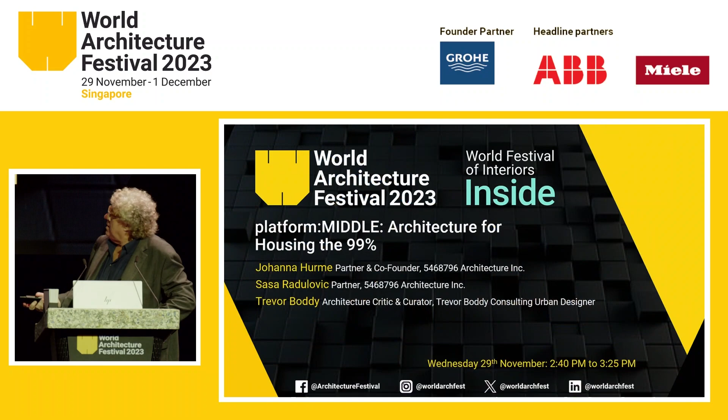Okay, this is the book, which you see is in a slipcase with 4 independent, editorially autonomous sections. Johanna will be talking about it in a moment.

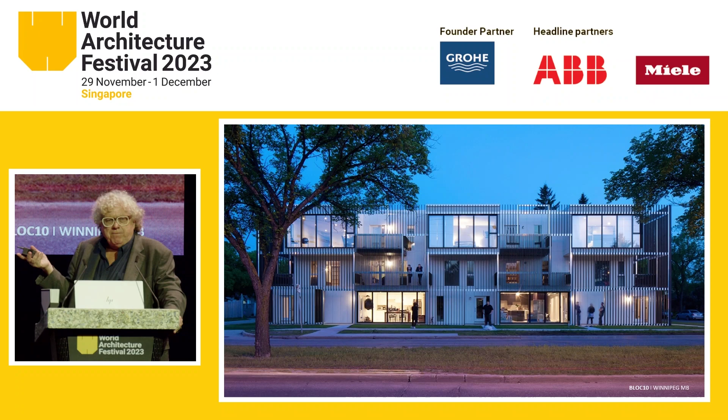This is the first building by 5468796 I wrote about. It's a housing project on Winnipeg's Grant Avenue called BLOC10—all of their projects have a number associated. To me, it's a fantastic interrogation of the idea of the walk-up wood frame apartment building, which is built all around the world. Now there are some problems with wood frame walk-up apartments.

Historically, Winnipeg has a high concentration of Eastern European immigrants, so the hallways of walk-up wood frame apartments always smell forever of boiled cabbage. Amazingly, even though more recent occupants are immigrants from Afghanistan and Venezuela, they still smell of boiled cabbage.

In a few moments, co-designer Sasa will describe their design approach to BLOC10 in detail, but suffice it to say that it entirely eliminates those boiled cabbage corridors. It gives every unit an entranceway on grade and rethinks how services are woven into buildings.

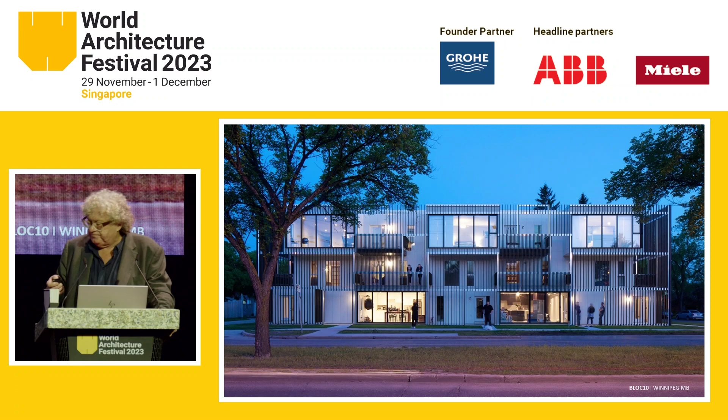The next project has a budget and a floor area equal to all of their previous work combined. This is the last parking garage ever to be built in the city of Calgary, and it was built with an eye to the future. It is future-proofed, and the design is adaptable into converting the trays of parking into housing, workshops, or offices.

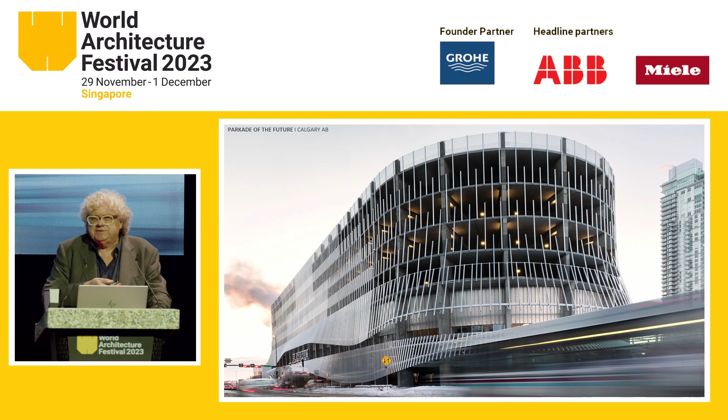So they will tell you why this came to be, but I think it's an incredibly innovative project. It's for a time when even Calgary, center of our oil business, converts to other energy sources.

The last of the 5468796 buildings I've written about, and they're all in the book by the way of course, is the newest. This is in Winnipeg on a riverside location. It is a century-old brick pump house, water installation, which has been converted into retail, restaurants, office uses. But above it, and very cleverly, they've inserted some really, really interesting housing floating above and around it. And I think it's a kind of paradigm of adaptive reuse of historic building.

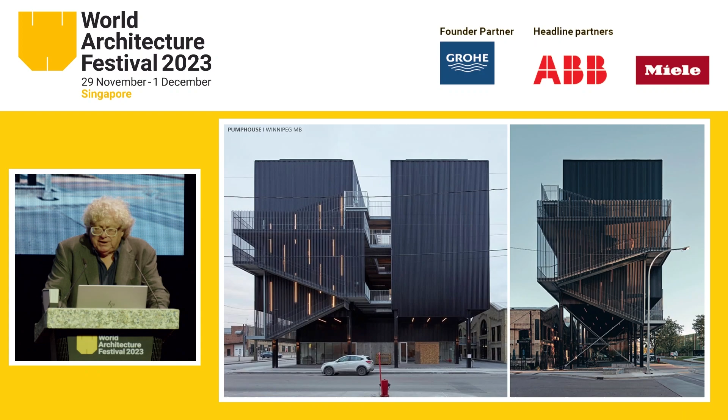Okay, enough of me. So now a quick introduction to Johanna Hurme, who will get into more detail about their book. Johanna is a native of Finland who came to rural Manitoba on a high school exchange and basically never went back to Europe to live. Her awards are enormous. Her teaching at Cornell and elsewhere, innovative, her intellect sparkling, and of course, her clothing constantly and solely black.

Two things to note: while most architects shun such civic duties, she's the former president of the Winnipeg Chamber of Commerce. Now, how many architects put their names on the line to enter politics or to serve the business community? There's one in the room, but there's no more. I'm happy to announce here today that Johanna Hurme has just been named the next president of the Royal Architectural Institute of Canada. Ladies and gentlemen, Johanna Hurme.

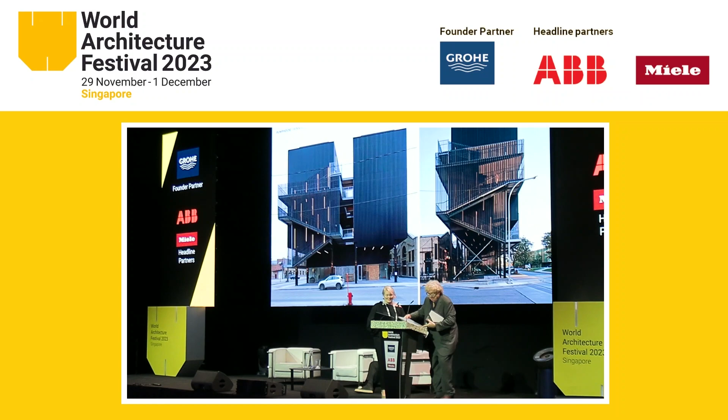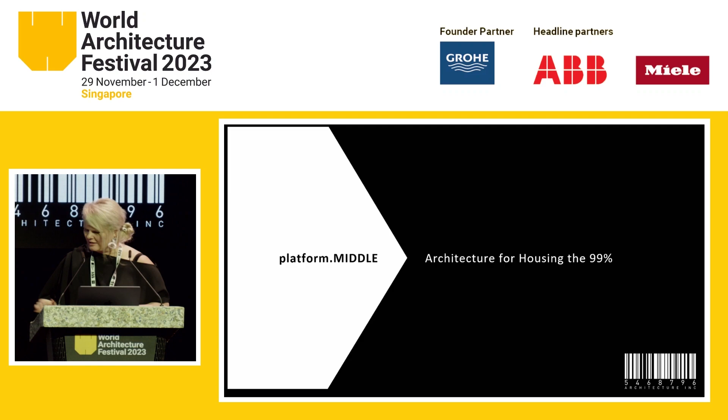All right, Trevor, come back. Oh, okay, he's coming back later. All right, thank you, Trevor. And did you take the clicker?

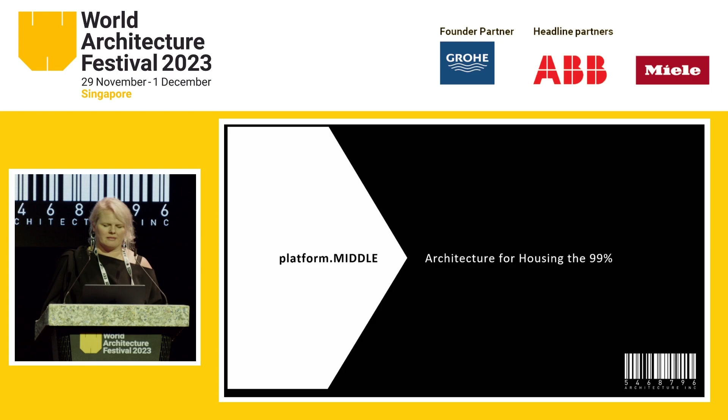Thank you. So yeah, we're here for our new book. Title is shown here, and it's been a 4-year labor of love. As many of you know who've done a book before, much more work than you thought, but on a topic that we really care deeply about: multifamily housing that is perhaps seen as the most mundane of the architectural typologies, but one that touches people most when they go about their everyday lives.

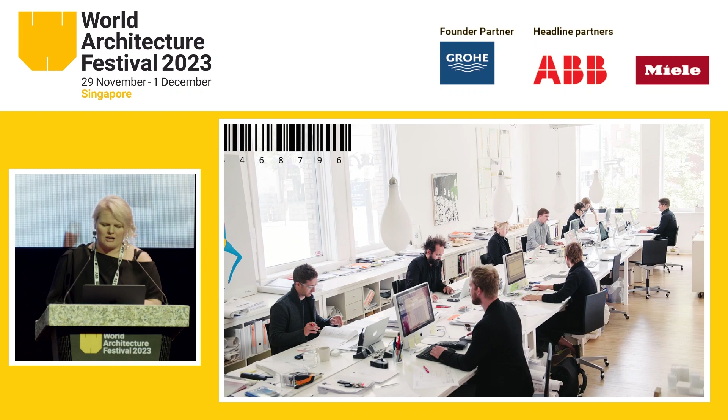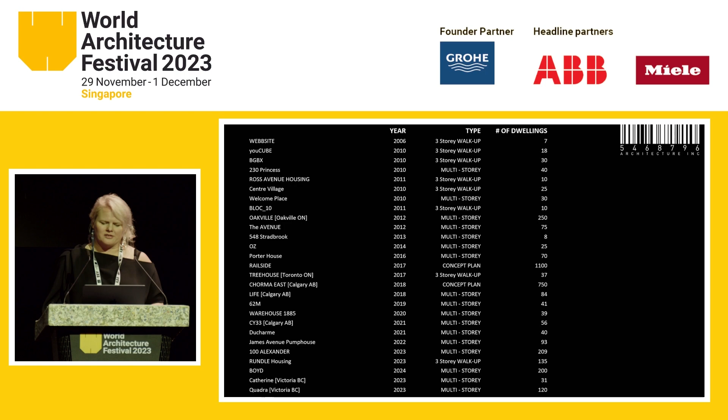5468796 began in 2007, so almost 16 years ago in Winnipeg, Canada, and somewhat serendipitously, we got into housing in our first year of existence. And since then, we have completed thousands of suites, and many more are in the works. And through that effort, we've learned a lot of strategies aimed at improving the end outcome for the user while maintaining client performance and a fairly ambitious architectural agenda.

The book itself consists of 4 parts, and more importantly, it is not intended to be a monograph of our work, but rather a toolkit or lessons learned aimed at students and fellow architects engaged in housing architecture.

And it all started as a result of a symposium that we organized as the visiting professors at the College of Architecture at the IIT in 2019. We invited a number of experts from across North America to discuss the particular challenges facing architects working in this sort of private sector, profit-led set of parameters. So volume 1, the middle, outlines the contents of that symposium and its conclusions.

Macro deals with issues of policy, politics, finance, and regulation that drive and shape the production of multifamily housing in North America, but aren't directly in the hands of the architectural profession. These are issues that any architect engaging in housing design must be aware of, but have very little control over, unless we get directly involved and take the effort to do so.

Micro is then the design issues that we can and do affect, the tricks and tools of the trade that can be deployed to increase quality. And finally, modeling is the reference catalog of our own work for where these lessons appear.

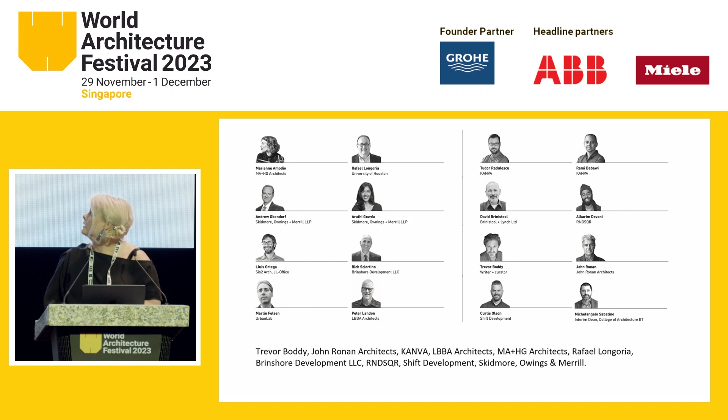It will be released by Arquine just about now. We have the first 30 copies available at the WAF today. Today we'll touch on some of the governing issues outlined in the macro book, and I'll talk about those, and then Sasha will focus on the sampling of the strategies we're providing in the micro.

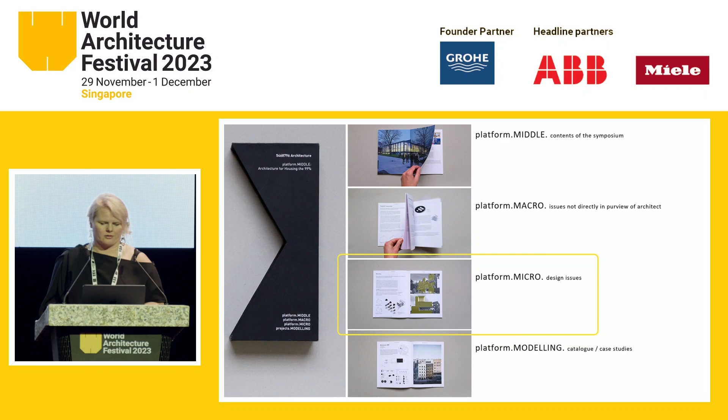Housing affordability in North America and many parts of the world has reached its crisis point. It's against the backdrop of rapid urbanization and an environmental emergency that we need solutions for city building that are more socially and economically sustainable, as well as multifamily housing that's more equitable and livable. One could also argue that attention in our part of the world needs to be in the middle of the housing spectrum, the focus of the book, for the reasons that this typology is largely lacking in North America and is much needed to create human-scale, ground-oriented city fabric and people-first places and spaces.

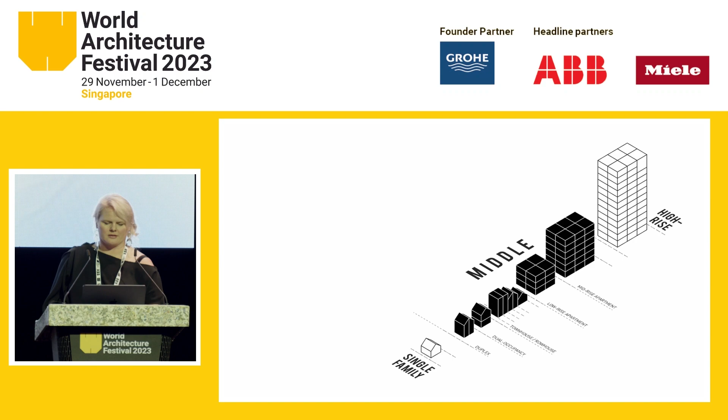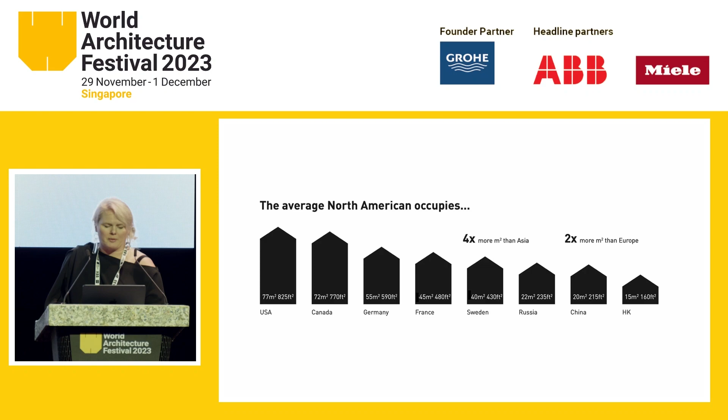Reasons for the housing crisis are many-fold and have not only an economic impact, but also a social and environmental impact. On average, the typical North American occupies about 4 times as much space per person as the average Asian, and twice as much space as the average European. So the expectations are vastly different and have vastly different impact on our collective environment.

At the same time, as many of you know, buildings are responsible for 33% of global energy consumption and nearly 40% of greenhouse gas emissions, further highlighting the huge responsibility we all share.

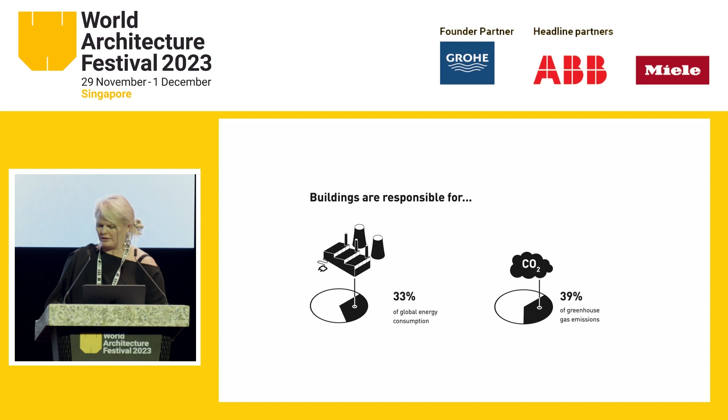Another key reason is the continually climbing housing prices due to the commodification of housing. In Canada, this is largely because of federal taxation changes in the early 70s that rewarded ownership speculation and ended support for large-scale purpose-built public housing projects. Essentially, it occurs when housing is treated as a commodity, a vehicle for wealth and investment rather than a social good.

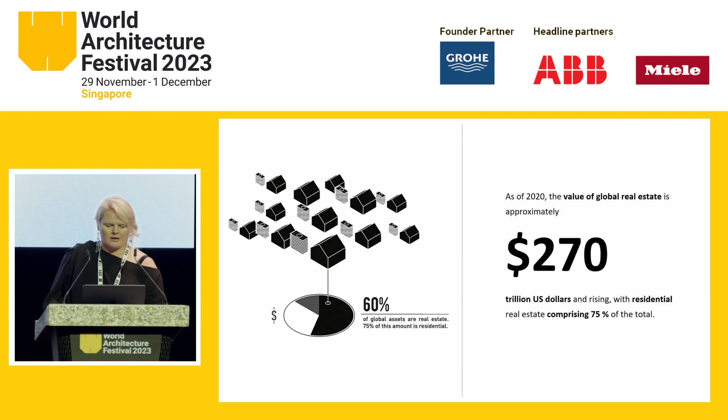As of 2020, the value of global real estate was approximately $270 trillion and rising, with residential real estate comprising 75% of that. Furthermore, 10% of Canadians live in core housing need, and nearly 30% of both Canadian and American households are cost burdened, meaning over 30% of their household income is used on housing.

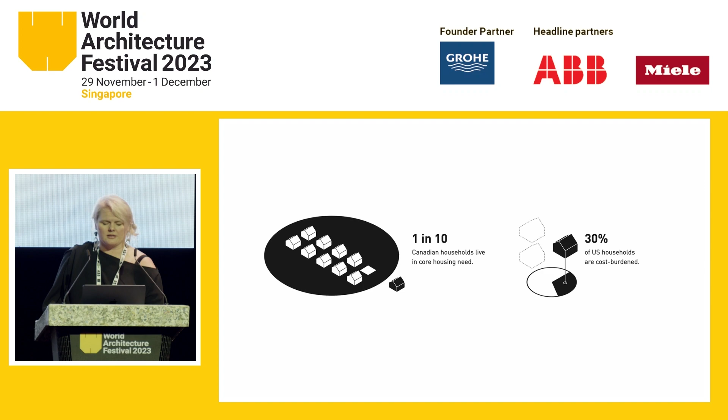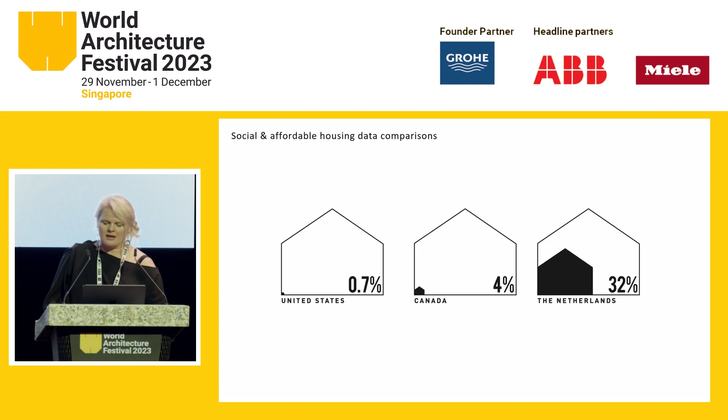But the main reason, above all else in our opinion, is that an overwhelming majority of the total housing stock in both countries is produced and owned by the private sector and driven by profit. Only less than 1% in the US and less than 4% in Canada of the total housing stock is owned and managed by public entities, compared to our European counterparts where that number tends to be in the mid-30s, and yet somehow we keep thinking we can solve the problem by doing the same thing.

In our minds, the basic form of architecture of multifamily housing in North America is generated as a result of 3 basic parameters: profit and efficiency, which results in deep floor plates and suites; a lack of governing policy, like in Sydney where they have a flat design code dictating how much sunlight has to reach the end of a suite, which we don't have; and the requirement for 2 exits, which again governs a lot of how the architecture gets shaped. Some or none of which are present in other parts of the world.

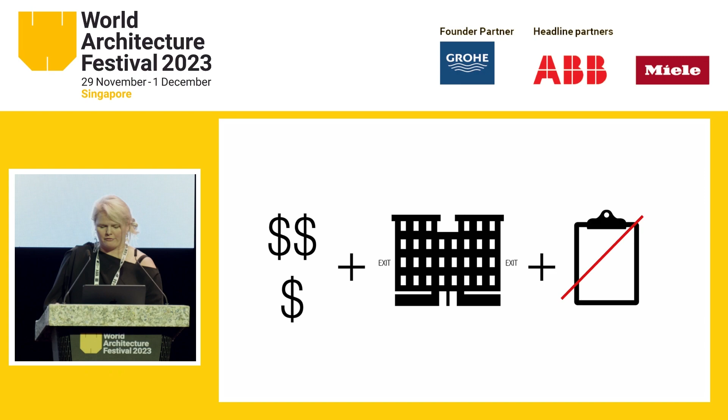So this is the framework that presents architects with a series of challenges hoping to achieve fundamental quality of living for the end user. Efficiency targets must meet or exceed the typical minimum of 85% rentable or sellable square footage of the total building area, and the traditional outcome of this pro forma objective is very deep units with limited access to natural light and operable windows.

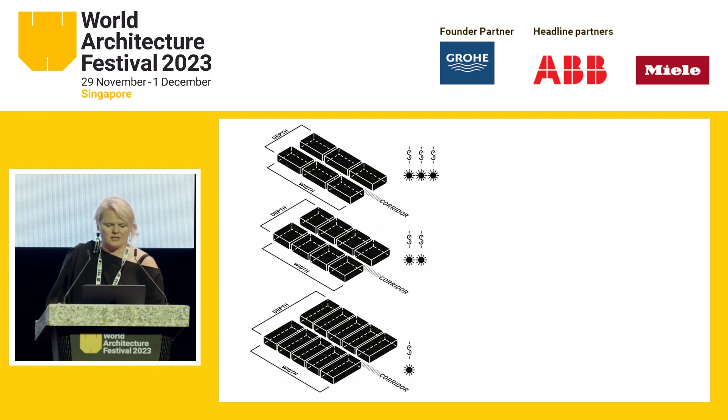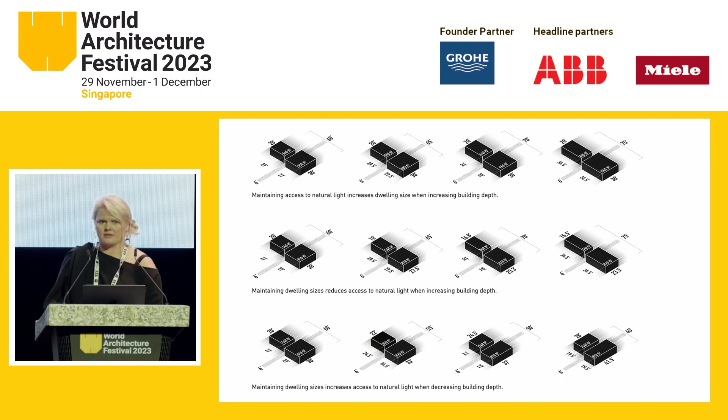So really, it boils down to always this battle of the perimeter, how to maintain access to natural light and ventilation while maintaining dwelling size and efficiency of the public spaces. What design solutions are there then that we can and have control over that can be deployed to improve the outcome within this set of framework?

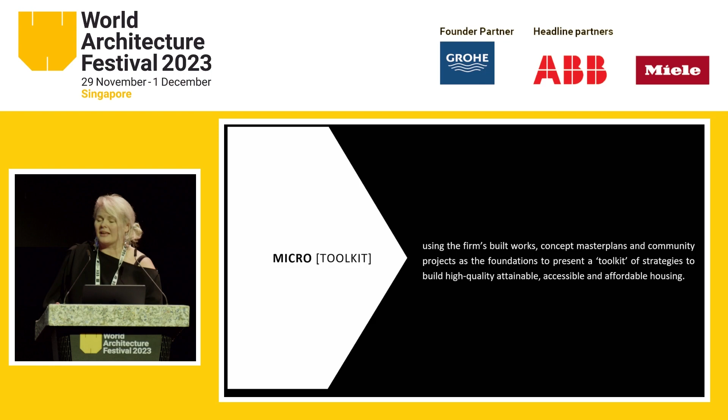We've outlined about 50 micro solutions that allow us to carve more room for quality and architecture and provide savings that can therefore be invested elsewhere in the project. None of the individual strategies are especially groundbreaking and may seem rather obvious in some instances, but we hope that gathering and sharing this learning in one place might help a colleague or someone just starting out in the design to hit the ground running, and as a result be able to spend their time providing the quality and innovation that's desperately needed to make mid-scale multifamily an attractive and attainable choice for more North Americans.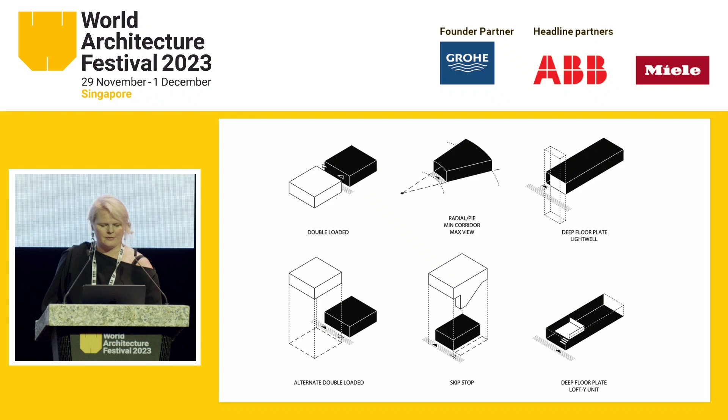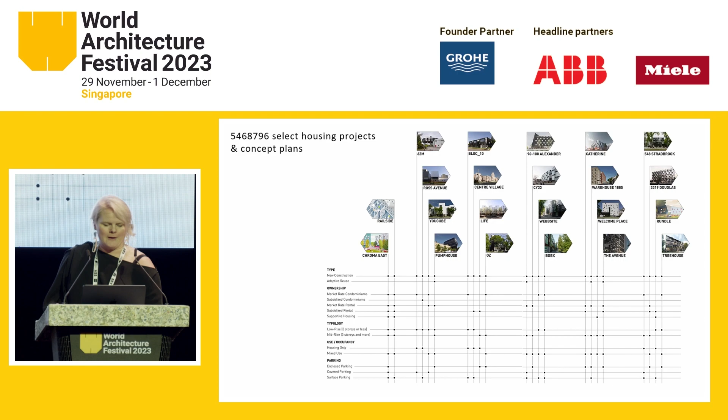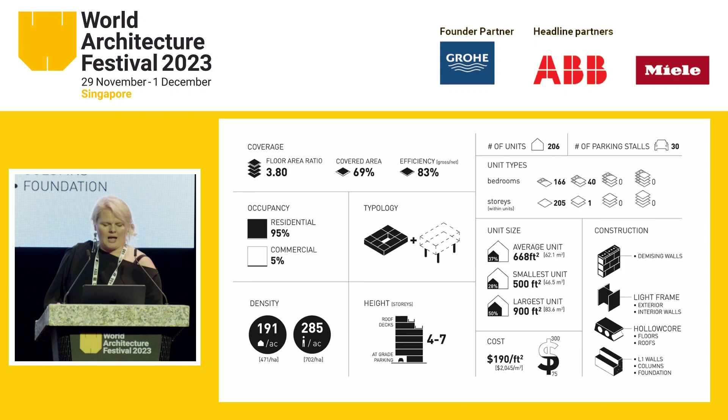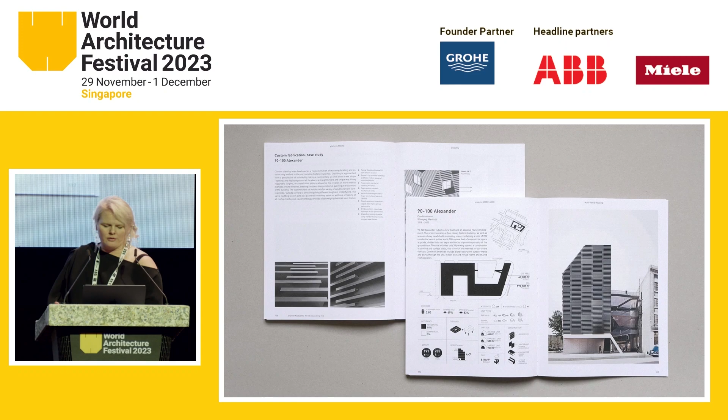The modeling part of the book, the particular strategies in the toolkit that are presented through the lens of our own projects, consists of 20 housing projects and 2 master plans. All of the projects presented are analyzed through comparable statistics covering anything from cost per square foot to density per acre, use, efficiency, unit type, sizes, number of stories, and construction type. We hope that the modeling or catalog can be referenced simultaneously while reading about the particular architectural strategy in the micro volume.

And with that, I will turn it over to my partner, Sasa, who's getting less of an introduction here, but anyway, he's awesome, to take us through some of the toolkit samples. Yeah, now that you've used up all the time and sprung this on me without notes - they just decided I should present about 2 hours ago.

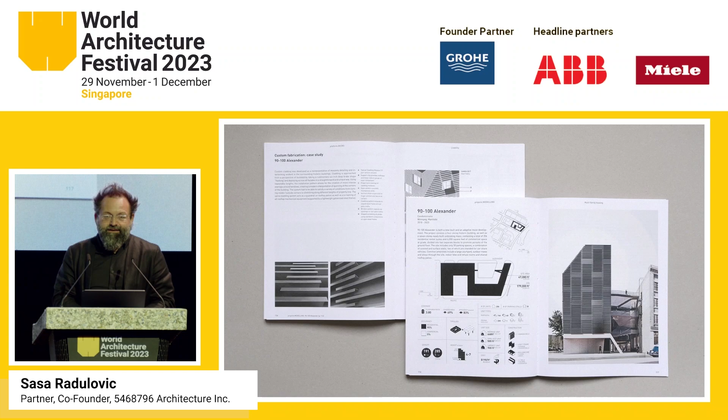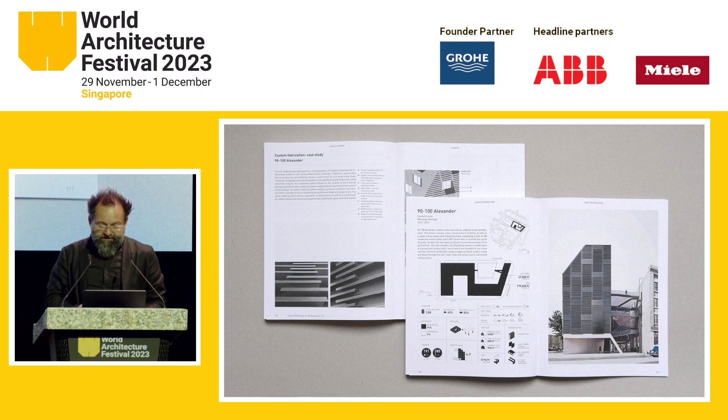So as Johanna said, the tools that we've tested through real-life projects are really the discoveries that we found contesting building codes, contesting zoning regulations, contesting politics, NIMBYism, and so on. Each one of them has affected one or more of those elements that generally shape the way we practice around multifamily housing.

The toolkit itself, which we again hope becomes something that architects can use to start from and to build from, as we find in Winnipeg with the lack of precedents that we encounter in our daily lives. Our search for the right response for the project always has to start at the very base, so we're hoping that this book elevates that conversation.

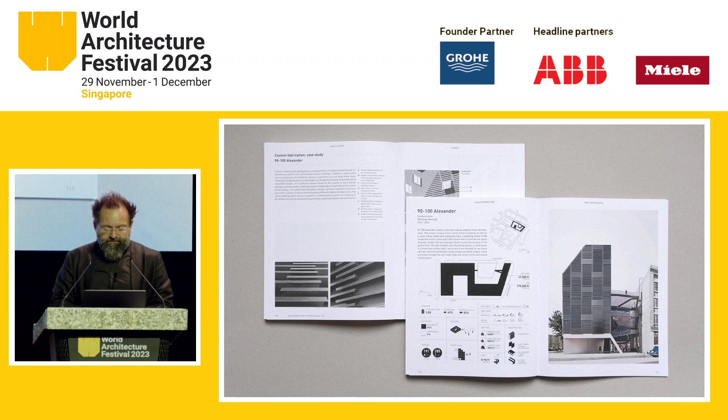So we go anywhere from critical opportunism to adaptability and resilience, to building in between. There's a long lost and forgotten art of city building when it comes to building in North America, and especially when it comes to multifamily housing and the livability as well.

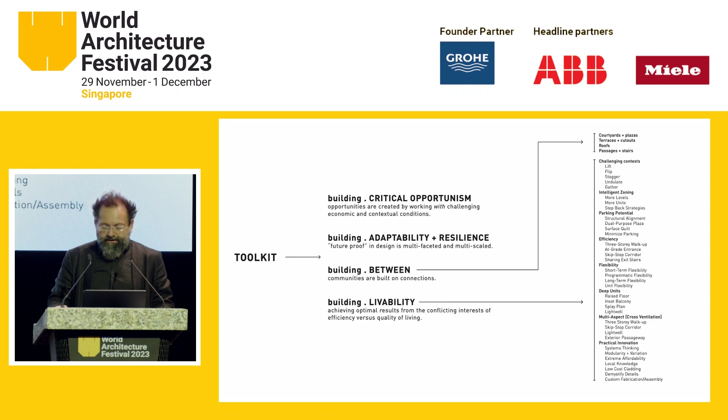Each one of the projects that I'm going to go through is going to take us through one or multiple strategies that we've employed on that project.

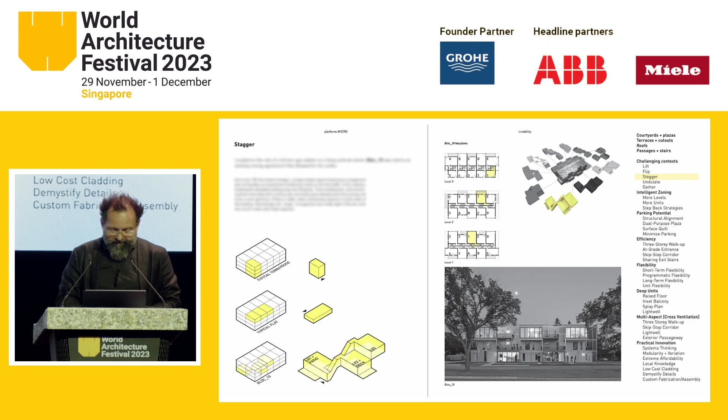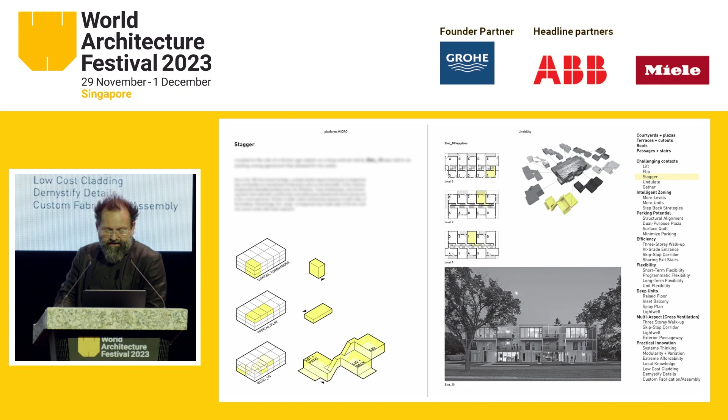Trevor brought Bloc_10 up as the first project that he's written about. The real interesting aspect of it is elimination of the corridors and reconfiguration of units into what we call a Chinese puzzle, which you can see here. The idea being that each one of the units, instead of facing and having a singular aspect, has at least a dual aspect. 8 out of 10 units in the project reach a corner, so they have a corner aspect as well, and each one of them has three spaces, one located on each one of the floors.

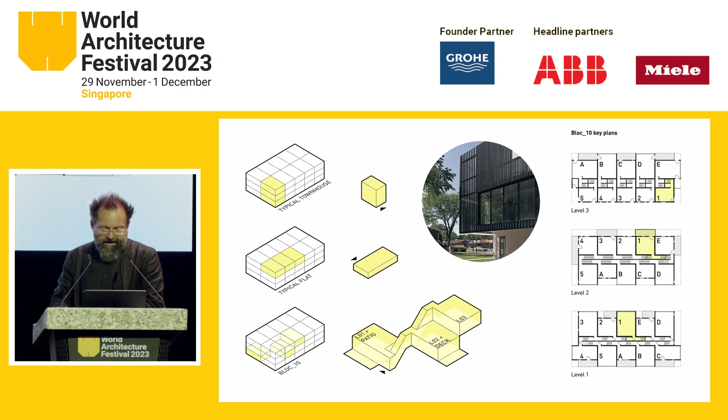So therefore, the variety within the space becomes such that the tenants themselves have ways to organize their life within architecture. This, we think, brought value when it comes to cross-ventilation, brought value when it comes to multiple aspects of a unit, and brought value when it comes to efficiency for our developers.

At-grade entrance was one of the primary ways of addressing the ways the building meets the street, in the form of a townhome, which is not as common on a multi-story project. The way that it again brings value to the bottom line is by reducing the amount of corridor space that one has to build once access is provided at grade.

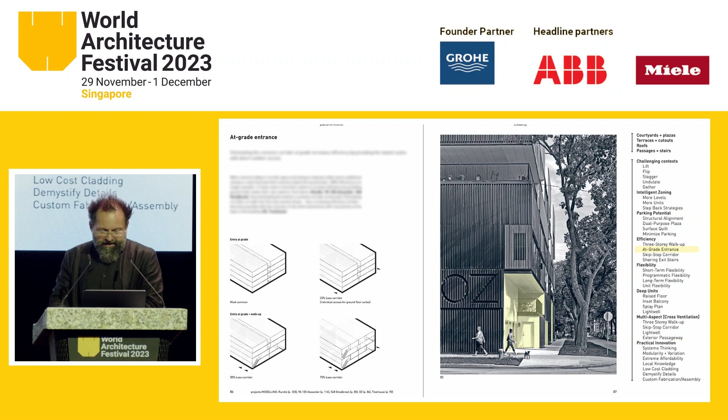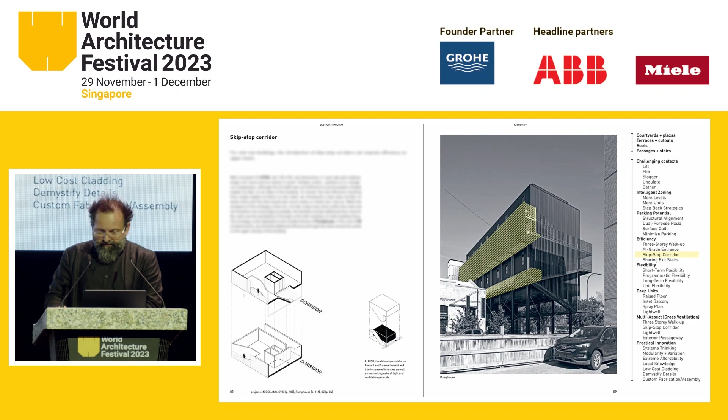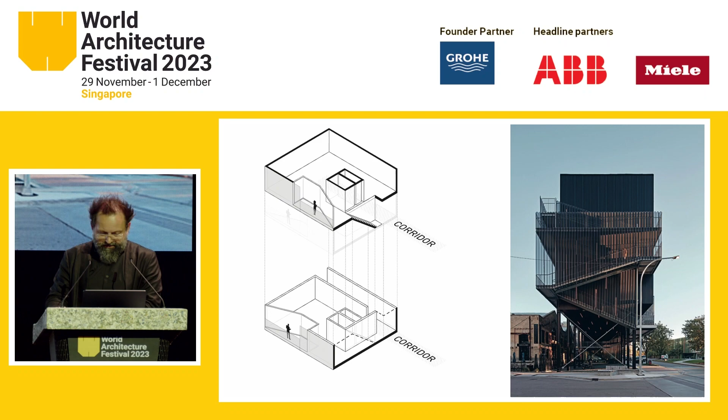We take that same logic up to the multi-story buildings with use of both open-air corridors and skip-stop corridors that allow us to have fewer corridors on projects where we are actually fighting for more footprint and site. This project itself is located on a 40-foot wide site, and our approach was to, while creating dual-aspect suites, employ the skip-stop corridor, which then allowed us to reduce the amount of corridors that we had to build. So we only have 3 corridors on a 6-story building, therefore maximizing the returns for our client and then shuffling those funds into architecture.

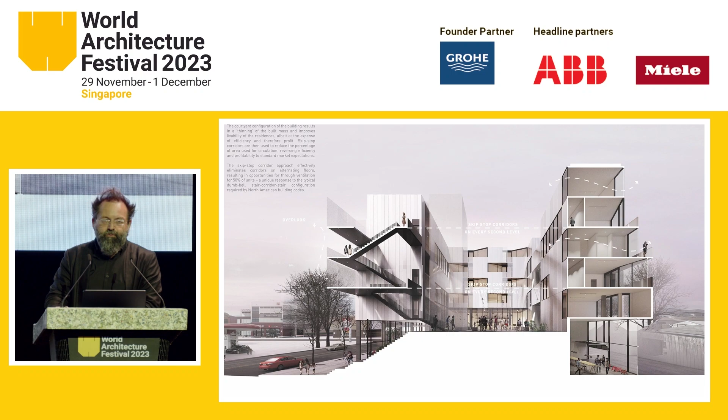The skip-stop corridor then we've employed on a series of other projects, again enabling cross-ventilation, which is so uncommon in North America when we are facing the 2 exit stairs and the corridor that connects them.

In housing, as those of you that work in the typology know, there's a lot of indecisiveness when it comes to the development community in terms of unit mix and suite mix. So we've deployed a strategy on our largest project to date, about 200 units, where we introduced something we call short-term flexibility.

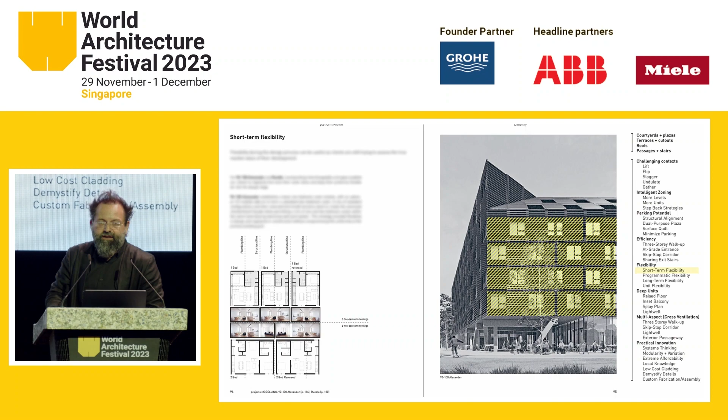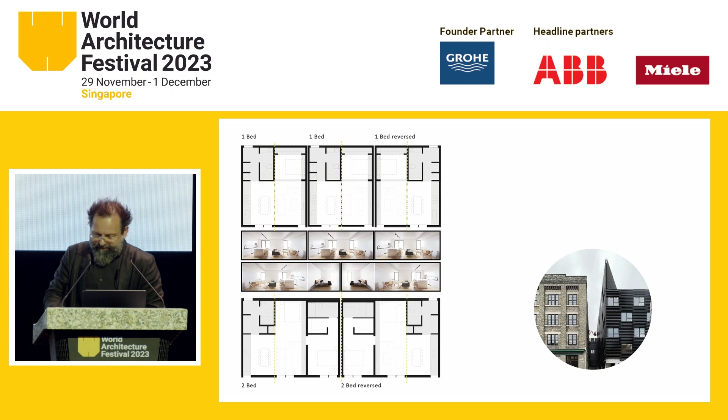We were able to, up until construction was complete, change the unit mix and the number of 1-bedroom and 2-bedroom units by introducing plumbing lines and maintaining structural lines that allow our client to change their mind up until or while construction was going on.

One of the first projects we ever got into dealt with the idea of programmatic flexibility, where the project consisted of 7 dwellings with the addition of 4 flexible spaces that could be owned by any one of the units that surround it.

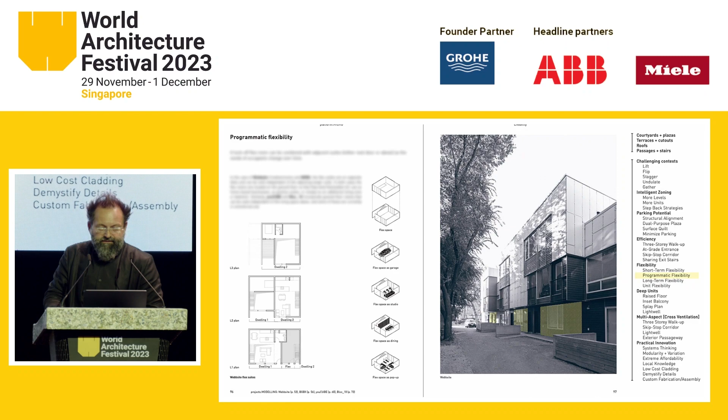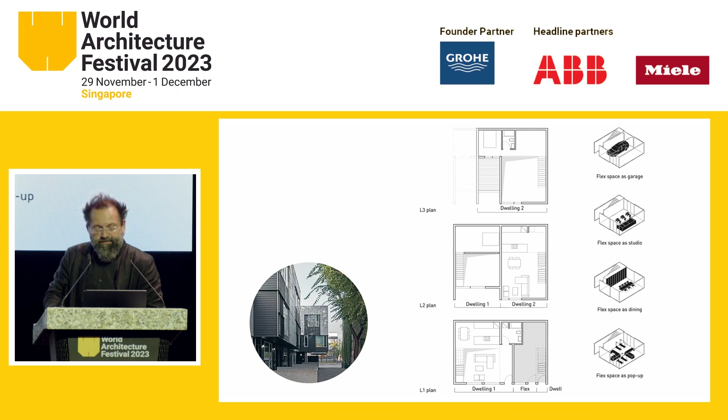By doing that, we enabled the life of the project and tried to extend it from being first entry-level housing to something that could house families, through expansion into the flex space, garages, studios, and so on. That evolution of the space was quite interesting to see, and the use is what makes the project more sustainable and maintains the community.

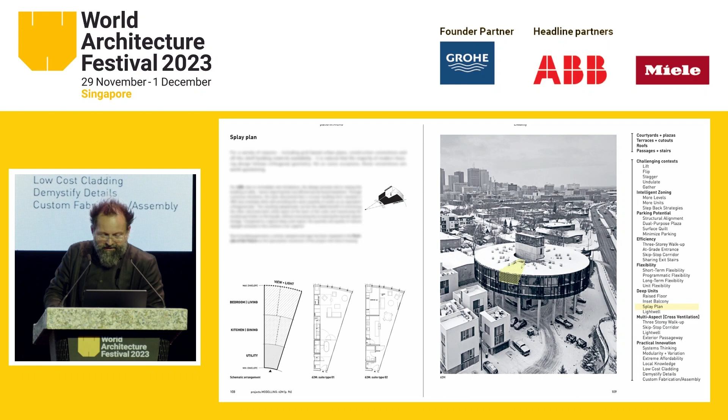As Trevor promised, the units are smartly planned so that we're able to reduce the amount of perimeter where we didn't need it, such as the corridor deep into the building, and increase it where we did need it, which was access to light. So the plan itself allows maximized views out, about 21 feet or close to 7 meters in perimeter where glazing is, but only down to 7 feet or 2 meters at the corridor.

So while these units might appear counterintuitive, the cross ventilation gained through that, and the expansion one experiences in the space next to the windows, is quite significant.

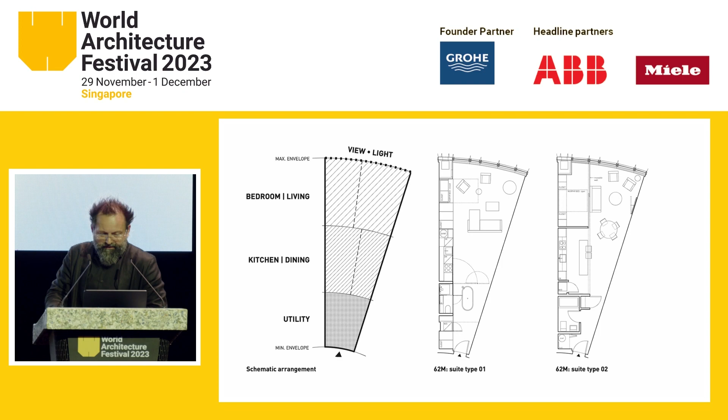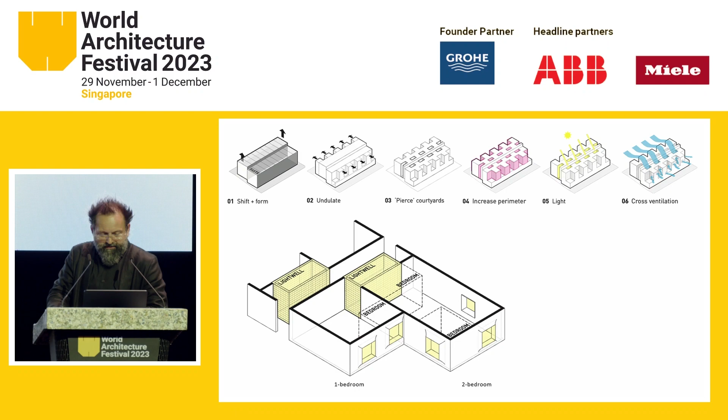I think lastly, or second last, is the idea of introducing a light well, a very common principle in housing about 100 years ago where I grew up. This permitted us to again produce cross ventilation in a mid-block building that's generally difficult in a corridor and two-stair configuration, where we're able to get 2-bedroom units that have light as well as access to fresh air.

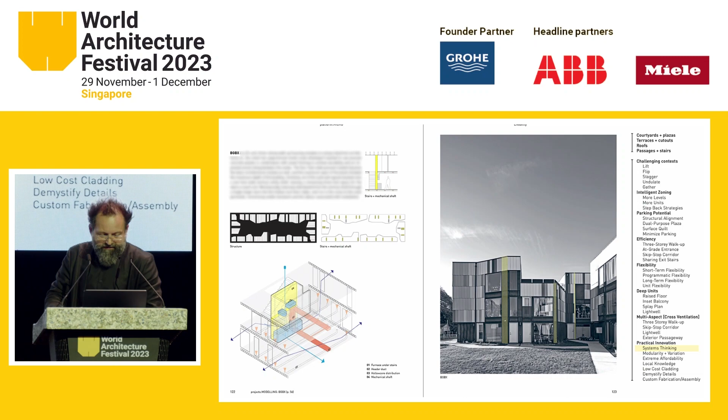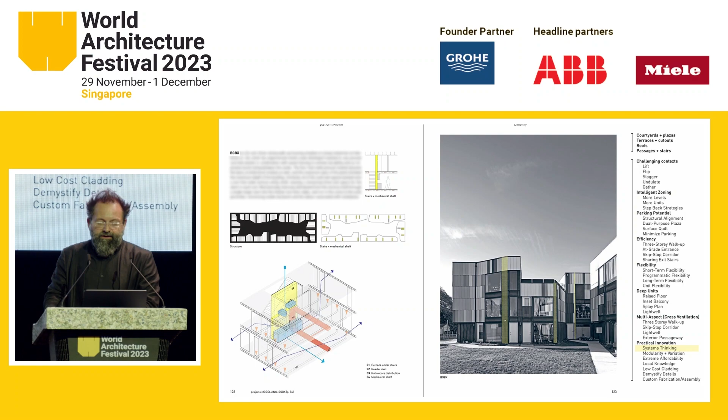Additionally, getting into the weeds here, is a project that on the surface does not appear modular or like a rigorous architectural exercise, where we combined structural hollow core planks, as we call them in Canada—prefabricated structural floor planks with holes to reduce their weight. We were able to use them for air displacement and air distribution throughout the building, eliminating most of the ductwork.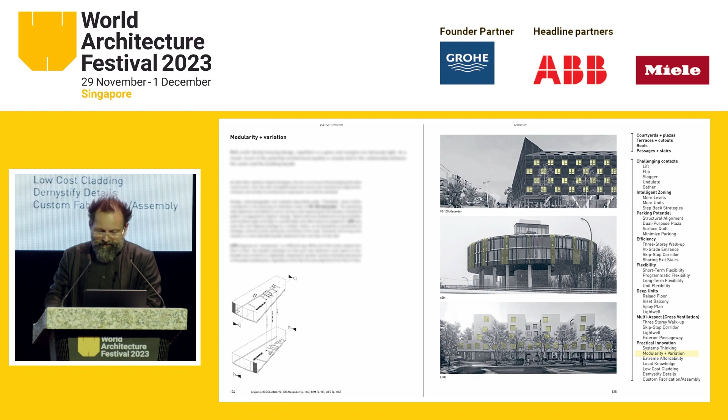Everybody who's tried to work in housing has encountered this idea of stacking, ad nauseam, windows that belong either to living rooms or bedrooms and balconies that then define the architecture. One of the most difficult things when approaching any housing project is understanding how that repetition will manifest in the outward experience or appearance of the building.

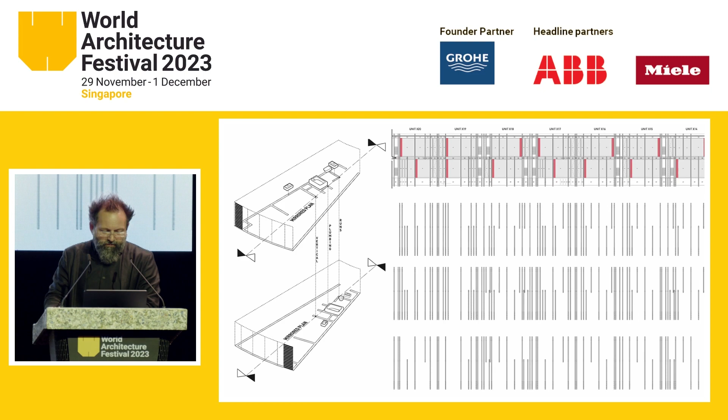On the 62M project, what we understood is that the plumbing lines define that lining of things, but we would have much more freedom on the outside, and we were able to decouple the facade from what happens inside the suite. By lining up the plumbing lines, we were able to switch the units back and forth, creating a variation that broke up the stacking of the cylinder itself.

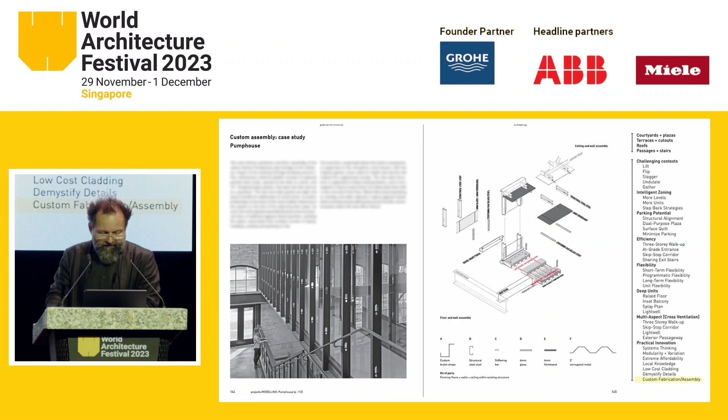As we get to the end of the toolkit, we get into the nitty-gritty—ideas of using things not supposed to be used for what we use them for. Such as in the pump house, where we ended up using off-the-shelf steel studs, recognizable, as a way of supporting the glazing system, minimizing the amount of glass, or cutting it in half in essence, by going to thinner glass—again moving away from proprietary installation methods and techniques.

So all of these help us do something very important and very close to our heart, which is to treat housing not as a commodity, but as a human right.

I think that was the end. Thank you.

Okay, thank you. Thank you, Sasha. Thank you, Johanna. We've got about 10 or 12 minutes here. We'll do a couple questions, and then I'll open it up to comments or queries from you in the audience.

Johanna, this is an ambitious box. There's an academic symposium at Crown Hall, Mies van der Rohe's building at IIT. There's modeling, which is examples of your own built work, a kind of mid-career monograph. There's a toolkit, which I think is pretty unprecedented in its range and variety. Tell me, what is the advantage of bundling all of these types of publications into one?